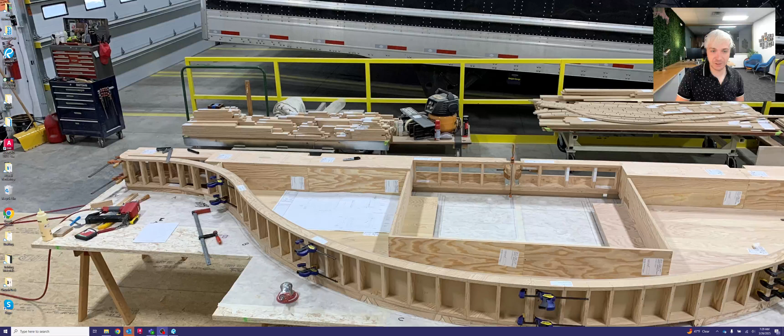Okay, this is video 3A. Today we're going to be talking about the standard cabinet construction as well as cabinet vocabulary. So as you work on things like cabinets, you're going to hear a lot of terminology thrown out there, which may not make a lot of sense to you right now. But we're going to go through that one by one to help you understand some of the terms that you get to hear when you're talking about cabinets or when you're working with cabinets.

So without further ado, I have these drawings pulled up. These are standard construction drawings produced by our engineering department here to help you understand the construction and the intentions of how we want to plot cabinet drawings. So let's start with base cabinets. So looking at the first page of this document here, these are base cabinets.

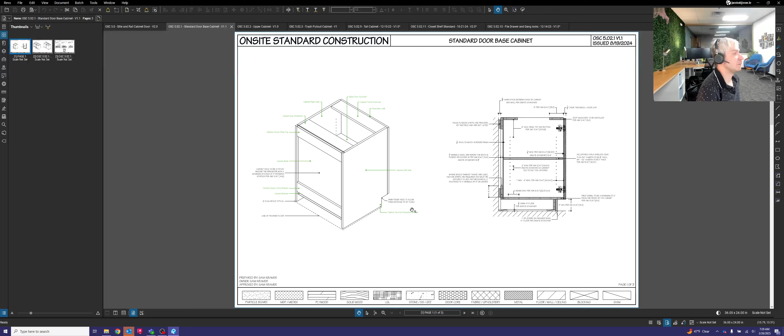Now, base cabinets are just cabinets that sit on the floor. You're also going to be looking at upper cabinets later today. Upper cabinets are wall-mounted cabinets. Of course, they are upper because they are hung above a counter. And we'll talk about that a little bit more as we get into that.

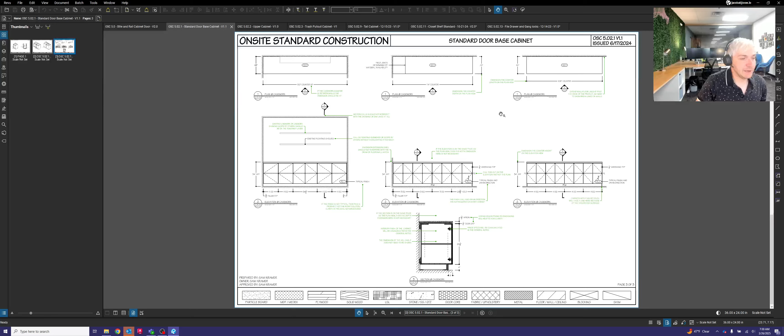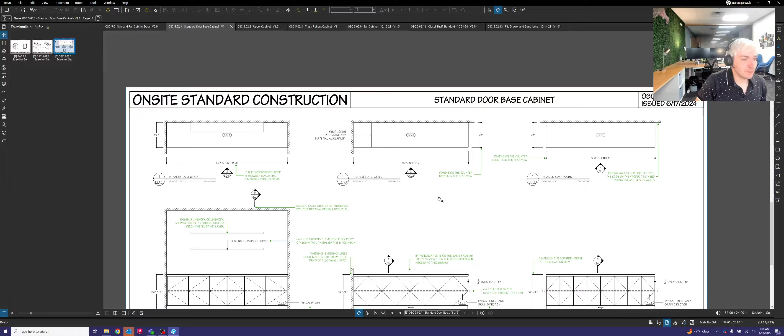With all cabinets, we'll go through the vocabulary here. Let's see, I'm looking at the plan view of this middle drawing here. So this is looking at the top down of a bank of cabinets. So you're seeing the countertop right here. And this line with the dashes represents walls around these cabinets. So these walls here are going to correlate to the elevation view down here. So this is looking at the front of the same bank of cabinets.

All right. And so going back to the top-down view, you can see there is no wall on the right-hand side. So these cabinets are kind of open to the room, meaning that one of the vocabulary terms I have for you here is what's called a finished end. On our drawings, we'll label that with an FE to the side of the cabinet that is going to need to have a finished end. Now, finished ends, it's just a term used for our shop and for our installers to understand that the side of this cabinet needs to have the same finish as the front of that cabinet because you will see it in that room.

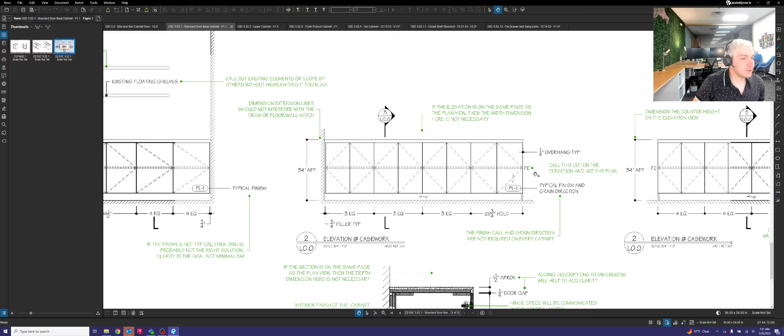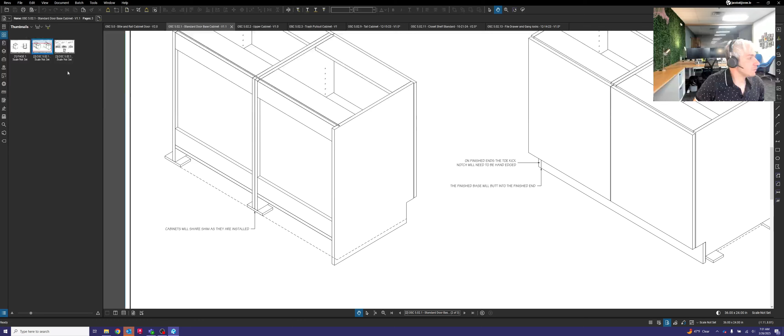So think about it like going back to this view here. So if this is that finished end here, this is the side of a cabinet because you're seeing this is the front door of the cabinet there. This is the side of the cabinet and this is the back of the cabinet here. So the side of this cabinet is what we would call a finished end because it is open to the room. Okay, so we'll go back here.

On the other side of the coin, if you have a cabinet that is going to be placed next to a wall, so like on the left-hand side of this plan view and the left-hand side of this elevation view, you will have to add what's called a filler. Now, our standard filler on cabinets is 3/4 of an inch. That doesn't mean that it has to stay 3/4 of an inch.

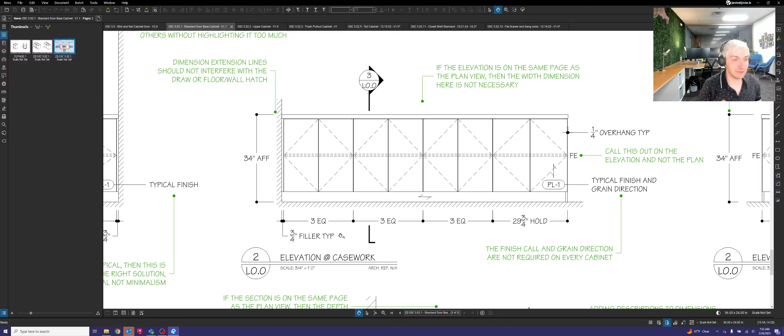Of course, if an architect is persistent on asking for a filler that's wider, we can definitely make a wider filler for them. We do like to deal with what we can as far as standards go for construction. We like to try to remain within standard as much as possible. So most times when you see a filler, it's going to be 3/4 of an inch wide, hence what we've got here.

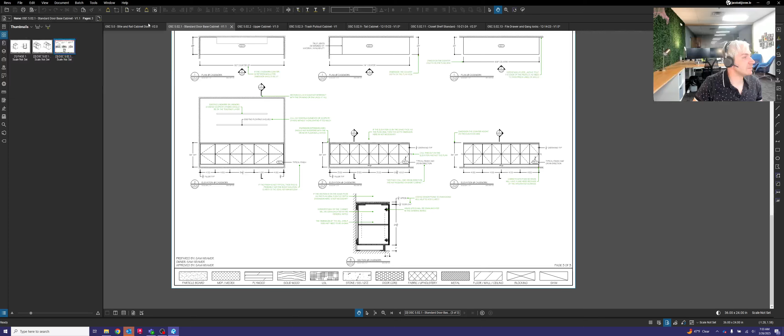Later on, we're going to talk about inside corner fillers, and those fillers are going to be a little different. They'll be wider than 3/4 of an inch, but we'll talk about that here shortly. So actually, why don't we just look at one right here if I can find one. Let me see if I got one in here. I might not. All right, so an inside filler is when you have two banks of cabinets that are coming together at a corner, 90-degree corner.

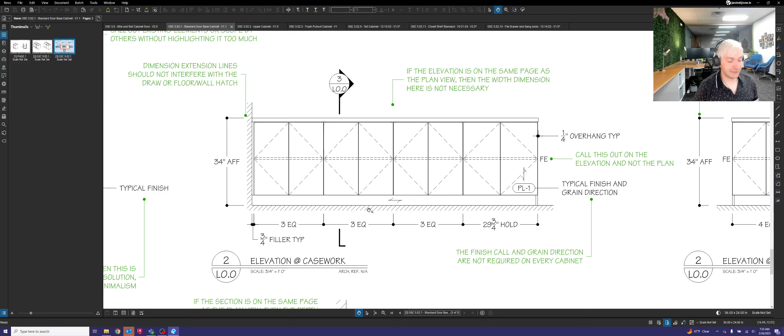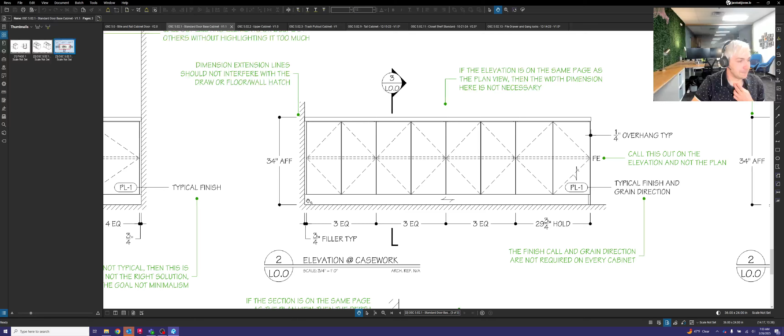I'll try to include a picture of one of those here if I can find one. But anyways, when you have an inside filler, meaning when you have two cabinets that are 90 degrees from one another on the inside corner of a cabinet or inside of a kitchen, you're going to need a filler that is 2 7/8 wide. Now that's 2 7/8 actual filler size, the seen part of it.

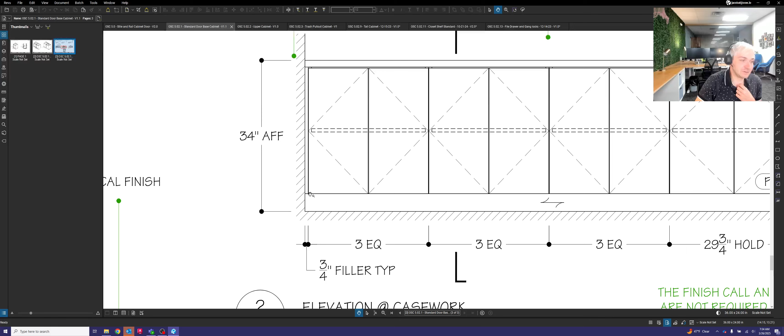So imagine there's a cabinet here, and we're looking at the front of the cabinet at that 90 degree, and then we have a cabinet over to the left-hand side. Now our filler would be 2 inches visible on an inside corner, but 2 7/8 total with the door excluded. So it's hard to visualize that. I'll try to come up with a better visual for you here shortly on that one. But that's what a filler is.

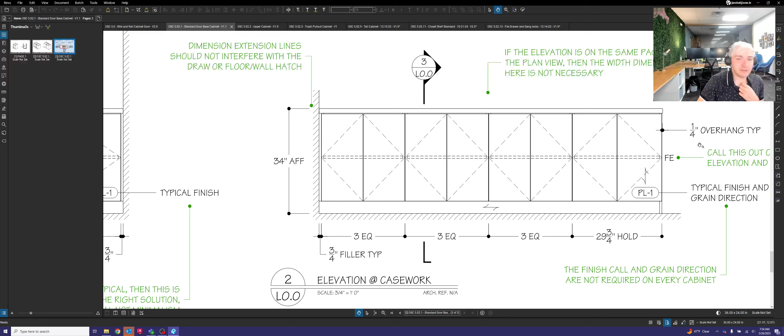And a filler really is there not just for, it's not like an aesthetic piece of what we add to the cabinets, but what it does is it prevents the cabinet door from swinging open and hitting the wall on the left-hand side. It also helps with occasionally you'll have a cabinet pull. So you might have like a bar pull on your cabinet that sits there. And as that door opens, you want to make sure that that filler is there so that this pull does not hit the drywall and do damage to the drywall or scuff it up. So fillers serve that purpose.

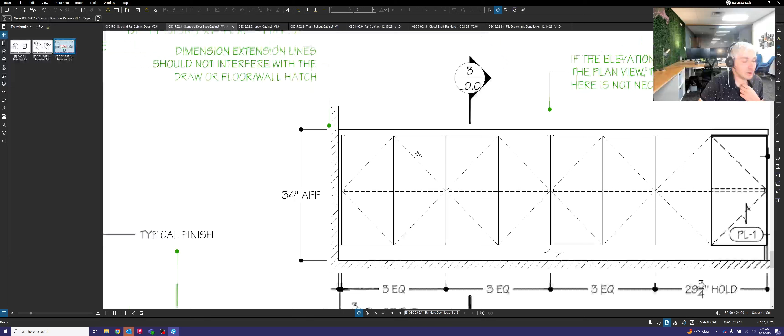We will also be looking at hardware later on. So in addition to fillers, there is a hardware that we use. It's called a hinge restrictor clip. And hinge restrictor clips also help with preventing the door from swinging open too far where it would hit the wall. They limit the angle of the door as it opens, so you can't open it past like 90 degrees, for example. So we'll talk about that in the next video when we talk about hardware, but that's another solution that we have that actually helps prevent drywall damage when a door is sitting next to a wall like this.

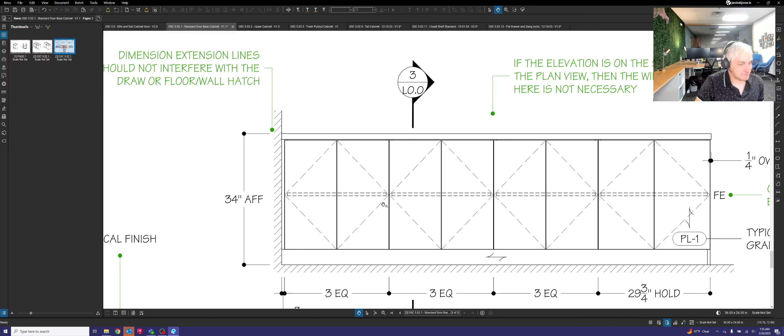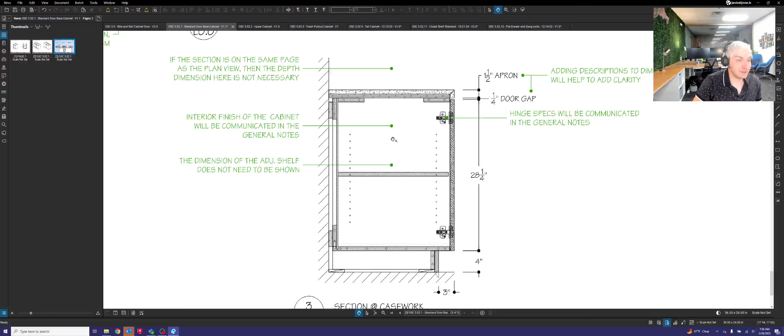All right, we are going to switch gears just a little bit. We're going to go look at a section view through a cabinet here. So let's go down to this view down here. So this is a slice through of a cabinet, a section view. You can see that we're cutting through that cabinet and we're looking this direction. So we're cutting through the cabinet vertically, looking that way towards the right. So that's what this view is here.

Now, there are some terms that we need to look at with a cabinet section that you won't see in any other view. One of those terms is down here. These are called shims. Shims are essentially ways to level your cabinet. So if the floor in the building is not completely level, this will help make it so we can make our cabinet level at the top. So meaning that when we go to install the countertop, it's not going to be completely out of whack and not level with the building.

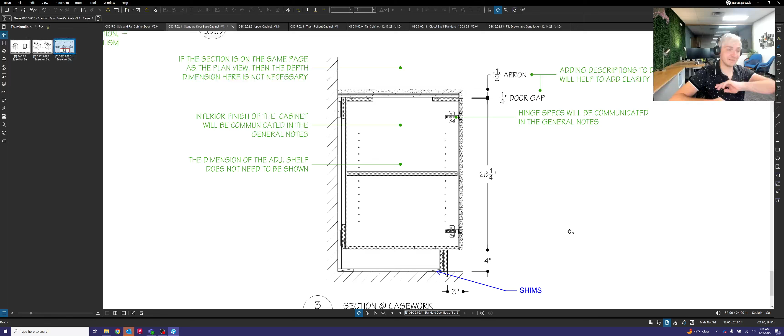So it is surprising, but a lot of the floors in these big commercial buildings are usually not level and they do have some variation to them. So that is why we have this shim space below our cabinet. So shims are just little pieces of material that we wedge under the cabinet to be able to level it properly in the field when it goes to be installed.

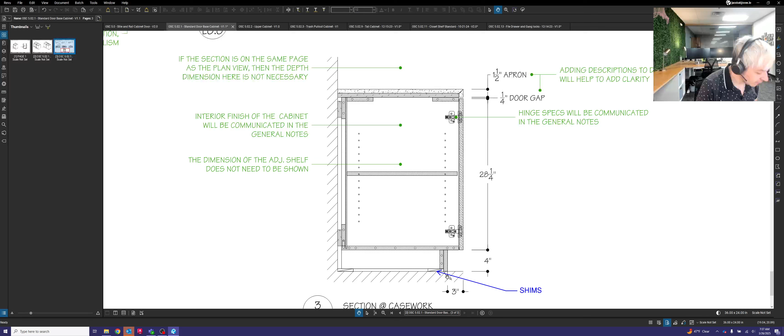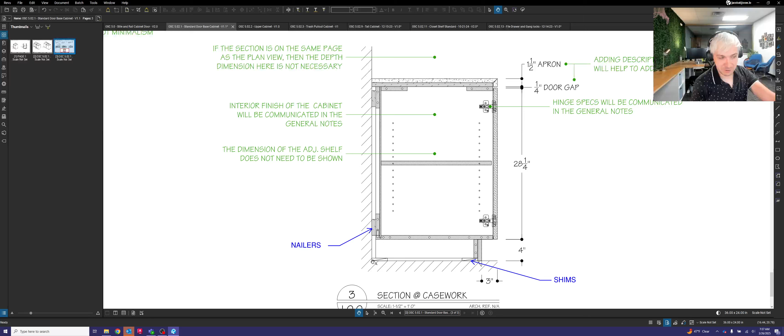At the back of your cabinet, you're going to see these wood blocks, just like this. These wood blocks that sit between the cabinet and the wall, these are called nailers. All right, nailers are typically going to be 3/4 of an inch thick by 4 inches tall. We'll sometimes use shim here too, but nailers will be used to kind of be able to control how far forward the cabinet sits.

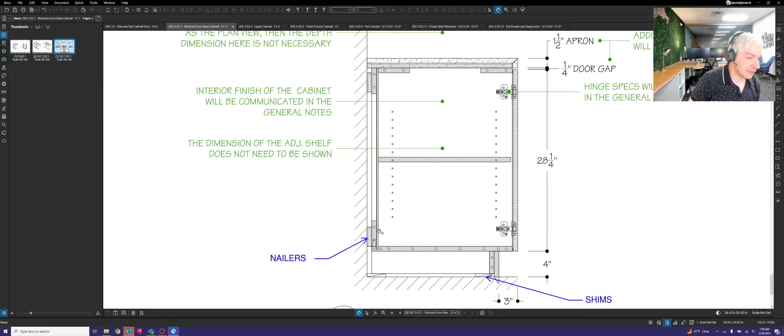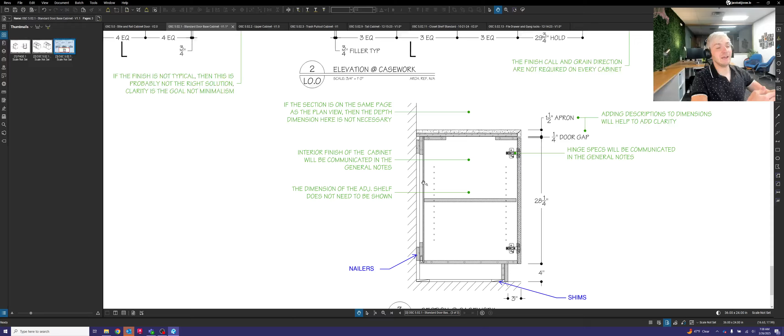So, for example, if you wanted your countertop, in this case, to be in line with your cabinet door, just like what's drawn here, you may need nailers or shim behind your cabinet to be able to pull that off, because just like the floor being unlevel, drywall does tend to be uneven as well. And so we're looking at a drywall wall that's back here behind this cabinet. And because it's drywall and sometimes they work a little too quickly when they install the drywall, it could be a little bit uneven.

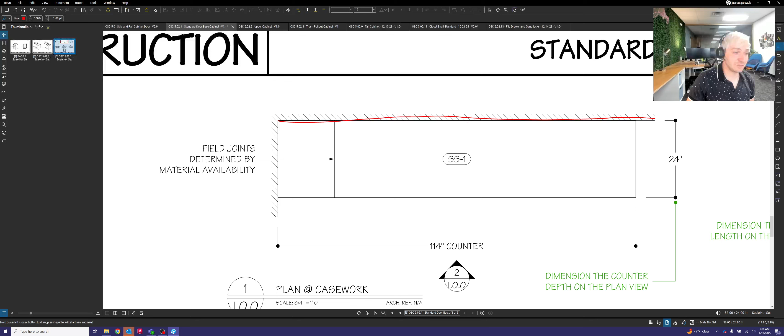So let's look at the plan view. If you look at a plan view here, it's not going to show that the drywall is uneven, but in the actual field, your drywall might actually kind of go in and out a little bit. And this is very, very dramatic, but it can vary slightly. So it might actually look something like this. And if that's the case, you really do need those nailers or that shim there behind the cabinet to be able to make sure that that cabinet is staying flush with the front edge of your countertop like that.

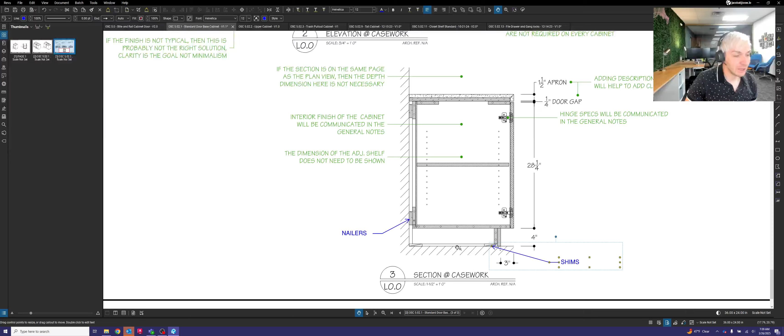So all of our cabinet blocks have those built in, so you won't have to really worry too much about having to include that on your drawing because it's already pre-drawn for you, but it's something to take note of and to understand why that's there.

If you see these little tiny circles on your cabinet block as well, these guys are wooden dowels. All right, so that is just a really tiny cylinder of wood that is used to apply glue to and to allow the side of the cabinet to be glued to the bottom and tops of the cabinet.

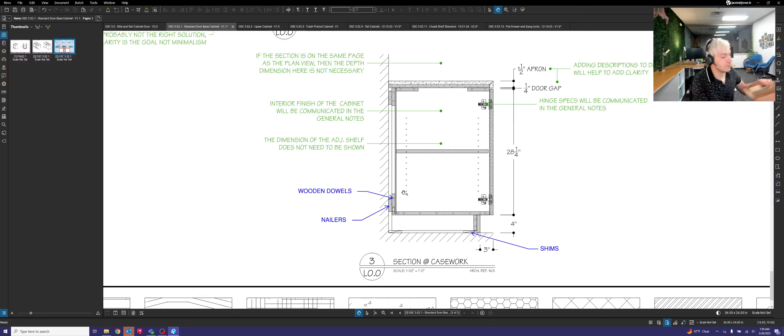I thought I had one here with me. I was going to present it here. If you'd like to see what a dowel looks like, you can go through the drawer behind you if you're in Loves Park, or if you're in Austell, go ahead and get a hold of me. I'll show you what one of those looks like.

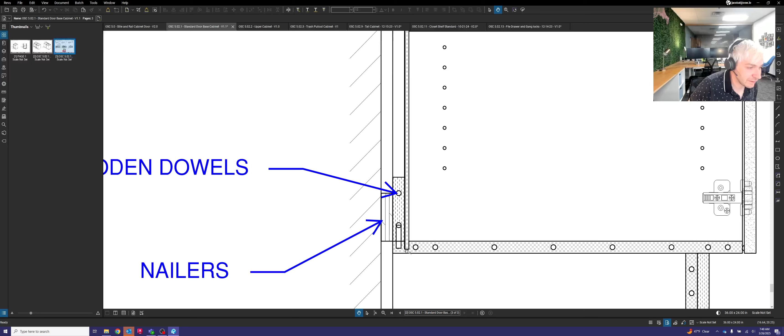But yeah, that's wooden dowels is what you're seeing there, as well as right here. Those are there to help hold the cabinet together as it's being glued. And once the glue is set, those dowels help hold it all together, make sure it doesn't go anywhere. It makes the cabinet real nice and sturdy.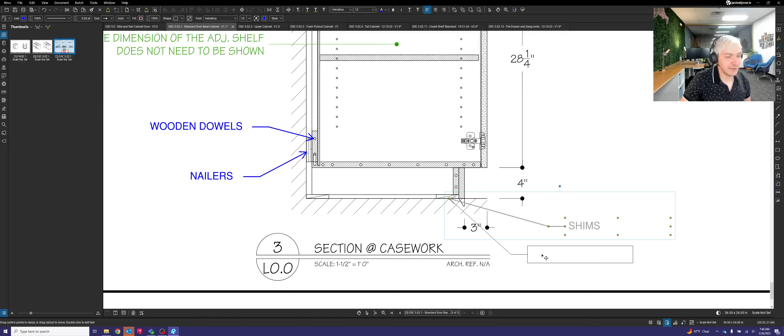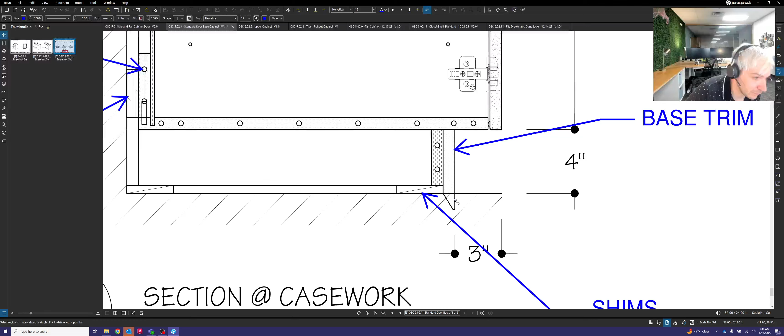All right. Also looking at the front of your cabinet, we have what is called base trim here. Okay. And base trim is used throughout a building typically. You will see it on cabinets a lot, but also on walls of the building as well. So at the bottom of that base trim, there's another vocabulary term we're going to talk about, and that's called scribe. Scribe, like that. So scribe is another form of leveling, essentially.

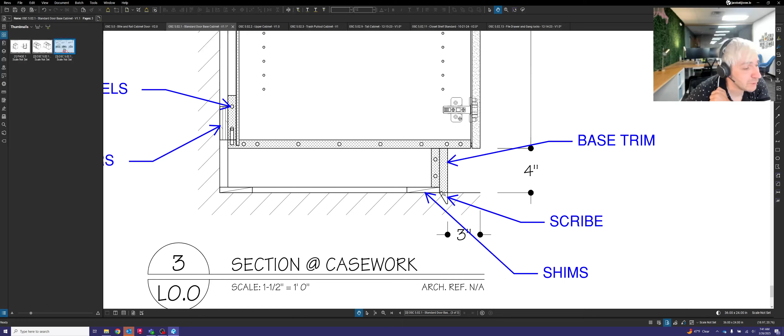So just like we level our cabinet because the floor may be out of whack, like it may not be completely level, if we were to make this base trim exactly 4 inches tall and the floor did kind of vary in height, this base trim would have a gap below it if the floor dropped at all. And so what we do is when we go to produce this base trim, we're going to add what's called scribe. Scribe is typically 1 inch tall.

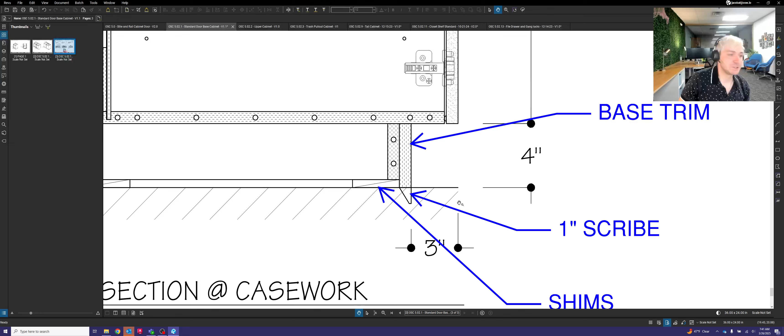And all it is, we are setting this base trim an inch taller than what's intended. And it has this little chamfered edge on the back of it, which will allow the install team to be able to install this. And if they need to, they can cut it down to be level with the floor. So scribe is really important when it comes to anything that actually is touching the floor in terms of panels or trim that's riding the floor like that.

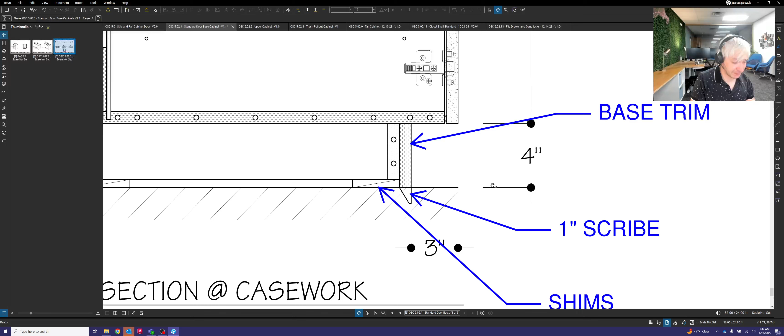You want to make sure that there is scribe there because it will make a huge difference when you go to install this. So again, it's kind of hard to visualize that from the AutoCAD side or from the engineering side. If you ever get a chance to go out in the field and see a job site, you kind of realize like, hey, this is why we need this here. Because a lot of times these floors are not completely level. So, all right, that's scribe. We've talked about nailers, shim, fillers, finished ends, and scribe so far.

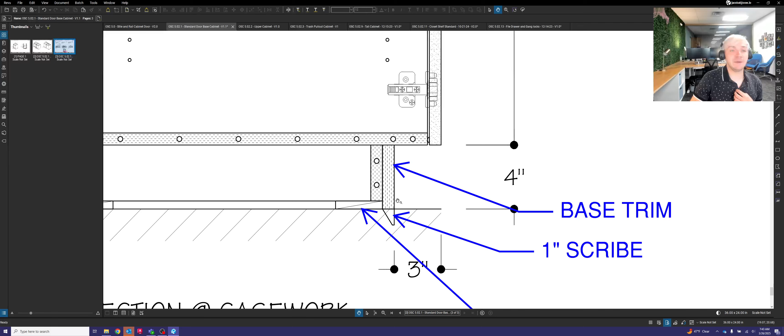Let's see, what else do I have for you? So we're going to also talk about a couple other things. Where the base trim is located, if you see a notch like this at the bottom of a cabinet, this is what is called a toe kick. So the toe kick is located at the bottom of the cabinet, and it's going to be just like this. That's another common term that you're going to hear when you're dealing with cabinets. So that's your toe kick there.

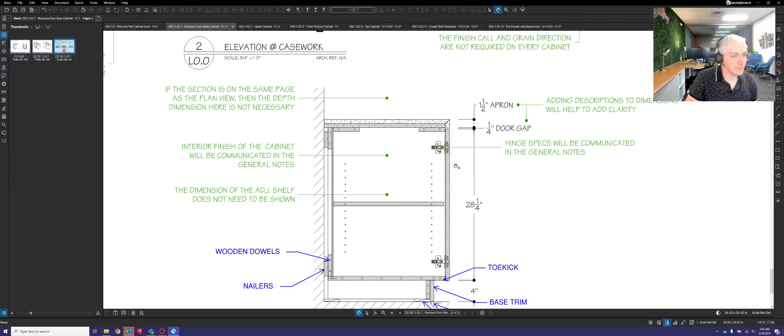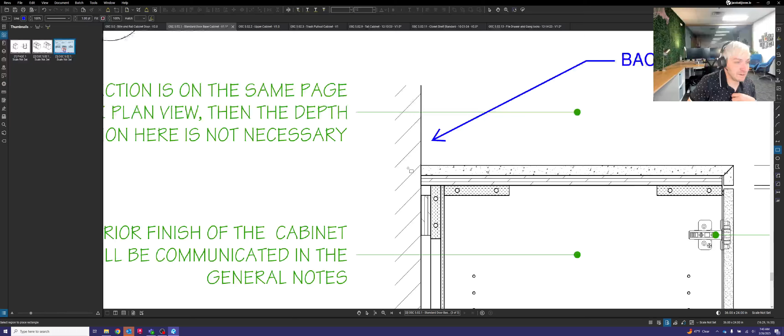As we make our way towards the top of these cabinets, although it's not drawn here, you've probably seen this before, but there are sometimes some things that are called backsplashes that you'll see. Let's call it backsplash here. It's, like I said, not drawn here, but a backsplash is kind of an extension of the countertop that sticks up like this. And sometimes there's even going to be things that are called side splashes, which are in the background here. You're going to see that right there. A side splash that's back there on the wall beyond.

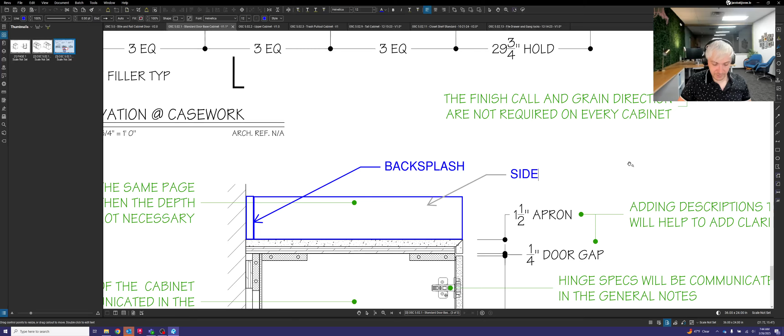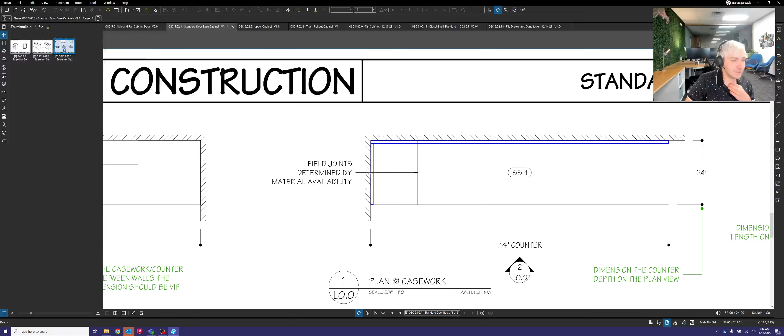All right. So we'll look at this in the plan view as well. So if you're dealing with a backsplash or side splash, what you're going to see in the plan view is your backsplash is going to run just like this, and your side splash is going to run right there on the wall side. You won't ever have a side splash on a finished end or an end that's open to the room, but if you have a wall like this, 9 times out of 10, they're probably going to ask you to provide a side splash too if they're including a backsplash.

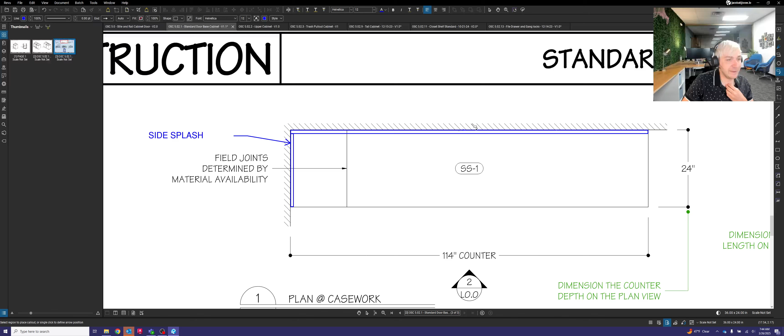So again, terminology here, this is your side splash. And this is your backsplash here. There's a couple other vocab terms for your cabinet drafting here. So once we get through that, we're going to make our way over to upper cabinets next. So upper cabinets, like mentioned before, they're just cabinets that hang on the wall. There are a few things we got to look at here that are a little different than what we have been talking about so far.

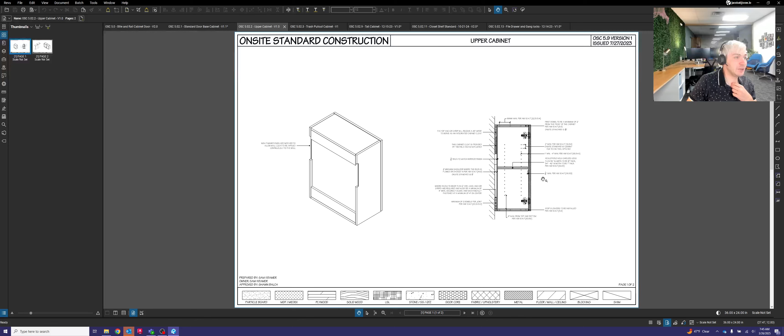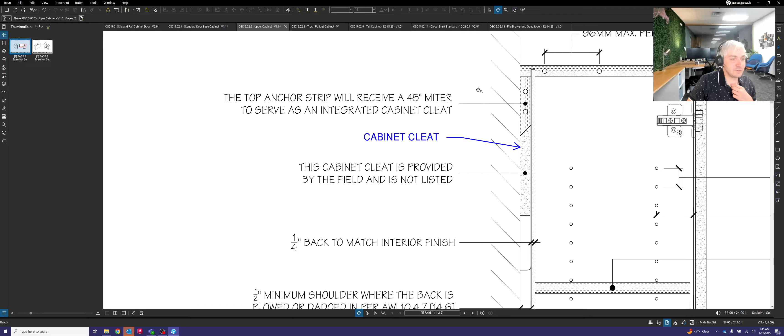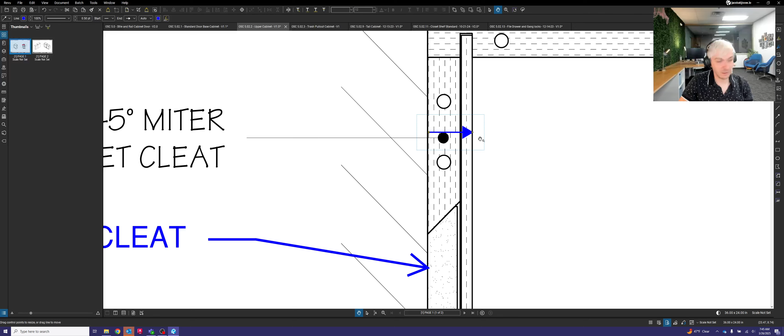So these cabinets, because they are mounted to the wall, they utilize what is called cabinet cleat. Cleat. Cabinet cleat is a form of French cleat. So if you do some Googling, you'll see French cleats are 2 pieces of material that are made to lap one another. So one piece of material will be fixed to the cabinet. So for example, this piece here is actually going to be screwed into the cabinet and doweled in. So this piece here is your upper cleat.

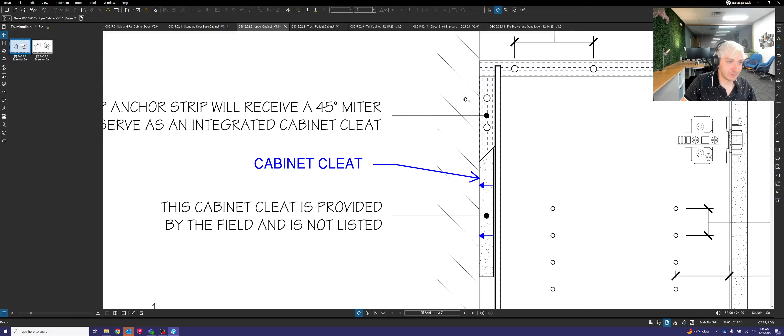All right. And then this piece that's down here is going to be the lower cleat. Now this part gets fastened to the wall behind the cabinet. So this will be screwed in like that to the wall. This will be glued, screwed, and doweled to the back of your cabinet. And then when they take this cabinet out to the field, they'll put this on the wall, and then they'll just take this cabinet, and all they got to do is lift it up and drop it on that cleat, and that cabinet is fixed in place and it's not going anywhere.

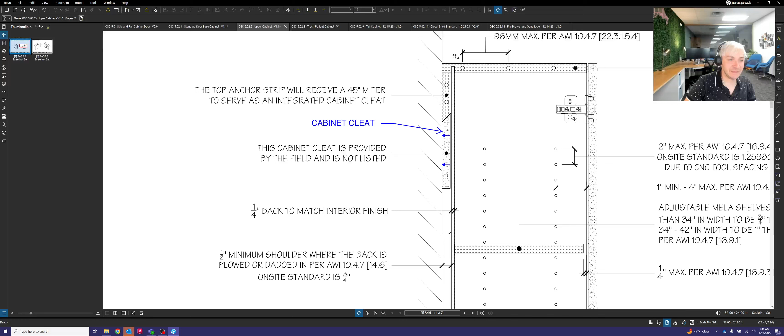So that's cabinet cleat. Usually sits right behind an upper cabinet just like this. We'll talk about panel cleat here when we get to panels later on as well, but that is just a form of attachment to the wall. Let's see what else we've got. So we talked about dowels already. That's the same thing here, wooden dowels here. All right.

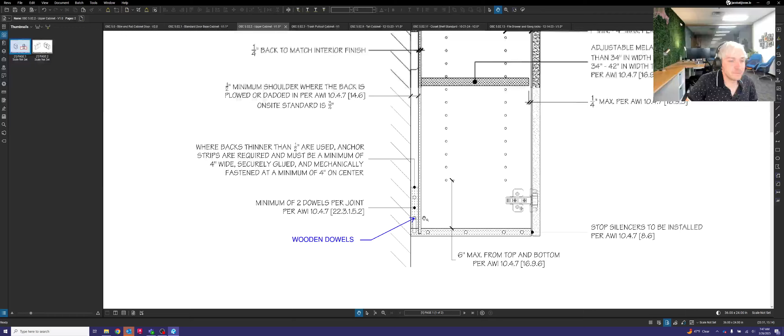Now upper cabinets though, a lot of times they will have what's called a valance. Now the valance can be located at the top or the bottom of the cabinet or sometimes both. And I'm going to see if we have, doesn't look like we have one in here specifically. So what I'm going to do is on the side here, I'm going to open up AutoCAD. I'm going to show you what a valance should look like on an upper cabinet.

Valances will usually be placed on an upper cabinet; most times what they're there for is to hide an under mount light fixture that sits below the upper cabinet used to illuminate the countertop below. So I want to kind of look at one of those real quick here with you. I'm going to open up an AutoCAD template file and we'll pull one in here for you.

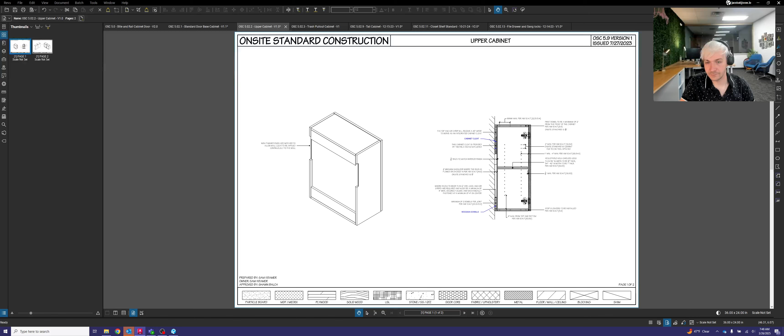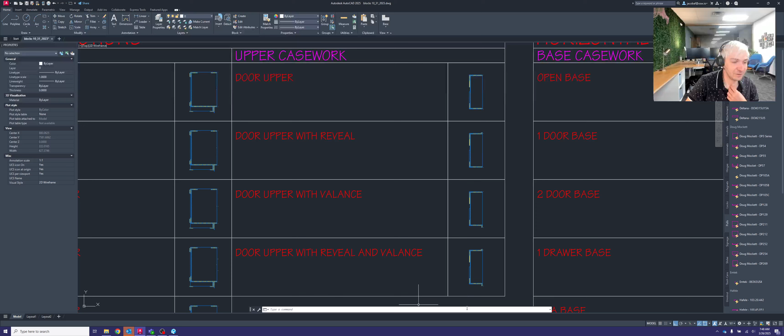Okay, let's take a look at an upper cabinet with valances. So, all right, here we go. Upper cabinets. What I'm looking at here is what we call the blocks file. This is what feeds the information into your tool palette. So all of these are available to you within the tool palette as well. This is just a kind of database that holds all of those blocks.

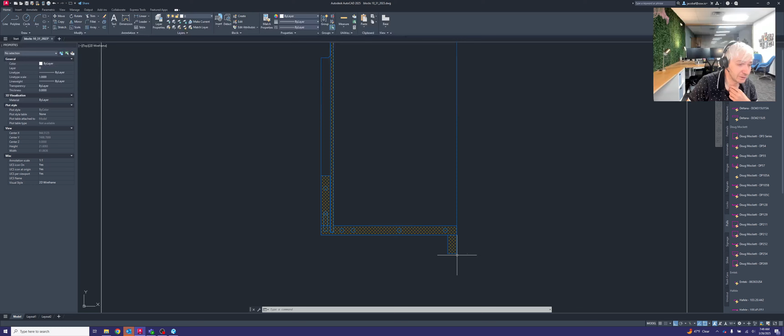So, right. This is an upper cabinet with a valance. So as mentioned, usually there's a light fixture that sits right here below that valance. And the cabinet is constructed with a piece of material that just sticks down below the inside of that cabinet. The cabinet door on something like this would still sit right here.

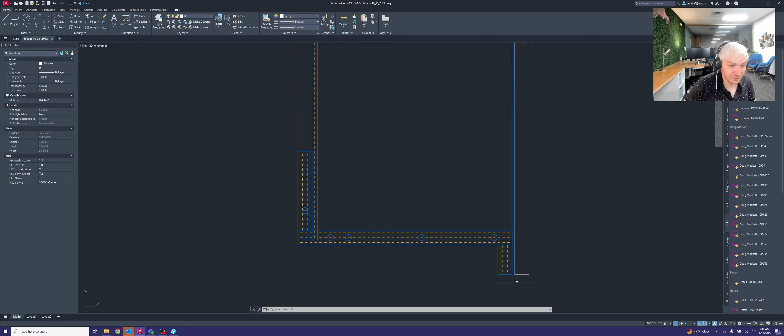Let's see, 0.75. Okay, so that white rectangle there is representing where your cabinet door would still sit. So the valance sits behind; the cabinet door sticks down, usually in line with that valance there. And then they usually will put a small LED light fixture right behind here, which will help illuminate the countertop. It would be below this cabinet.

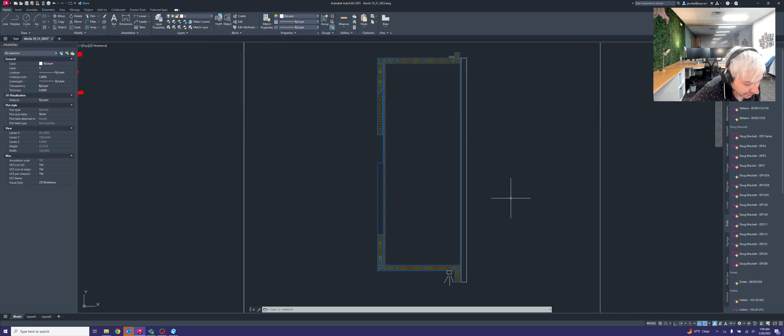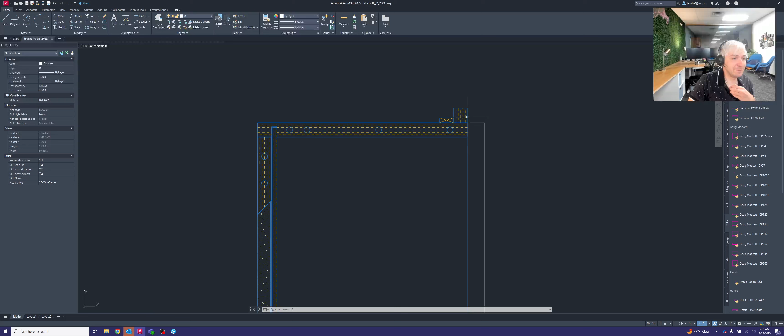All right, so with that being said, let's also talk about reveals here. So upper cabinets will use occasionally what is called a reveal. Reveals are a lot like fillers. So if you want to think about it kind of like that, just try not to get them too mixed up. A reveal is going to be a strip of material that sits between the cabinet and the ceiling above. So if you had a ceiling above this cabinet, let me drop one in here for you.

Boop, boop, boop. Oops, hold on one sec, sorry.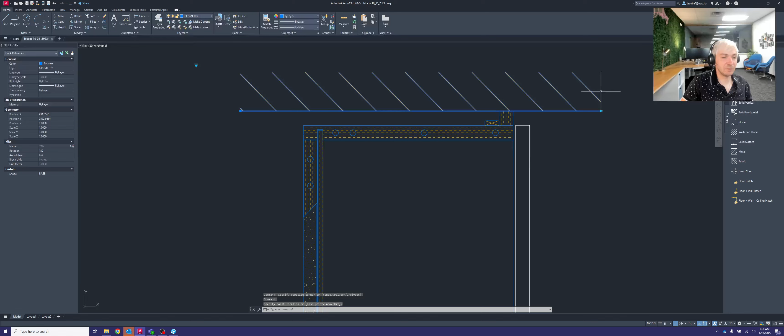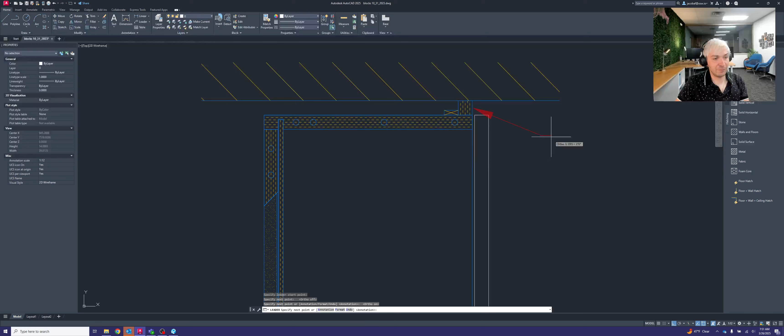Okay. So let's say your cabinet was constructed in a way where there was what's called either a soffit or a ceiling right above that cabinet. Now, if that does happen, it is going to be really important to remember that we do need to place a reveal in between the ceiling and the top of your cabinet. That reveal is going to typically be 3/4 of an inch.

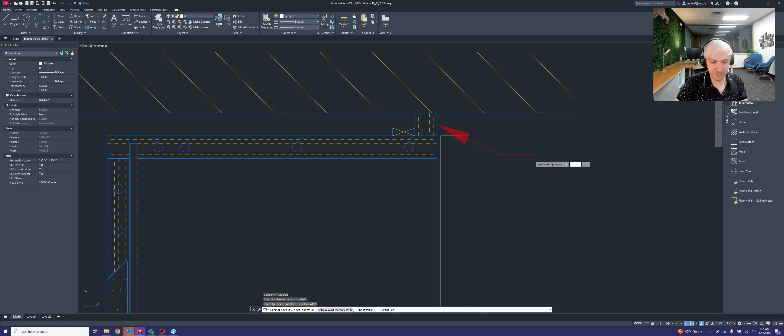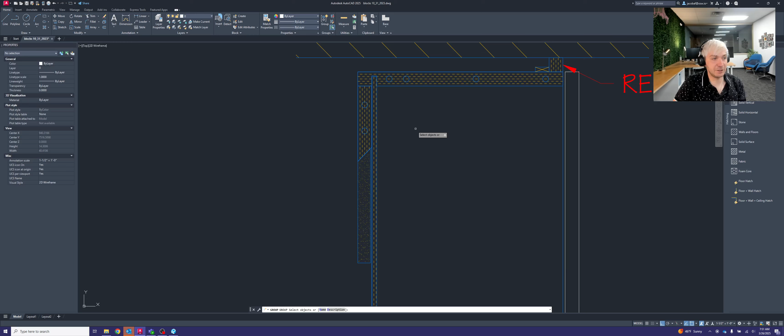And the reason that reveal exists might surprise you. You might think, well, maybe the soffit's wavy too, or the ceiling's wavy too, just like the drywall or the floor. Well, there may be a little bit of that, but really the reveal here is there for the purpose of, as you're installing this cabinet, the cabinet and the cleat that are attached to the cabinet need to have what's called lift-off space.

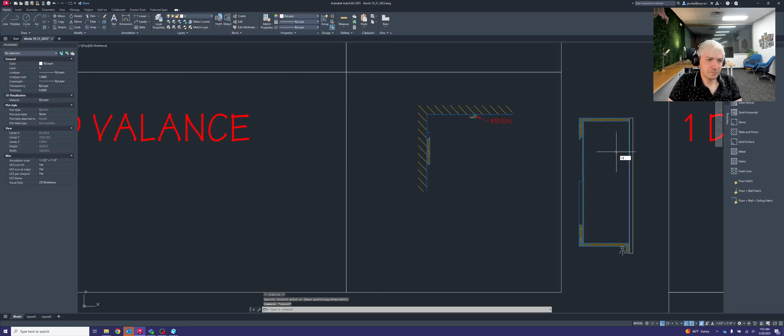So let me go ahead and group that together real quick. So I have this cabinet over here, and let me add a wall to this too. All right, so I have this cabinet over here on the side, and if I want to go to install this cabinet, I'm going to move this over so you can kind of see what's happening, I can't just slide the cabinet straight back because these cleats are going to actually hit each other and they're not going to allow that cabinet to pass through.

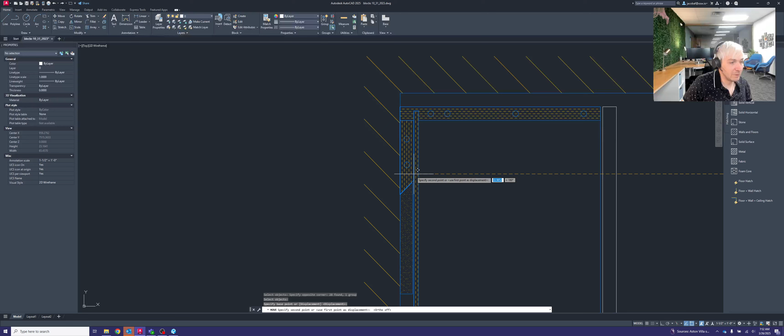So what I need to do is I need to have what's called lift-off space. So when I go to install an upper cabinet, I actually need to lift it up approximately like 3/4 of an inch, slide it back, and then drop it down like this, which will lock that cabinet in place, and then it's not going to go anywhere. But because of the angle on the cleat, I do need to be able to lift this up and move it forward or back to be able to install it.

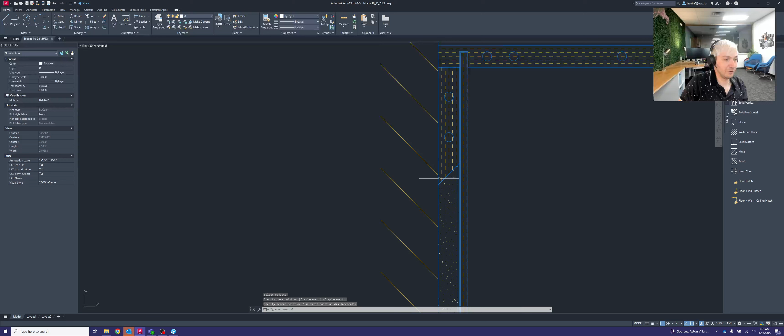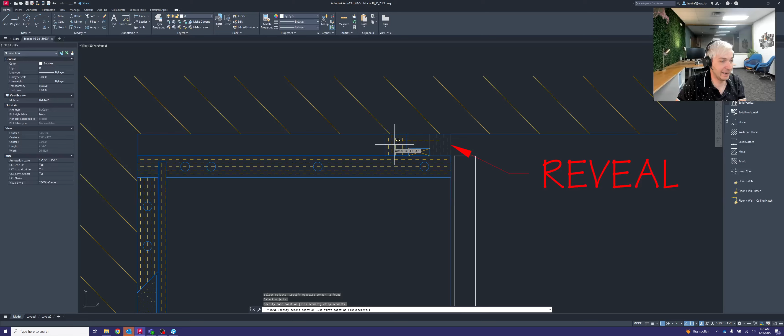So once the cabinet is installed, that's where we go and we put that reveal in after the fact. So the reveal will come in, it'll get shoved in place, kind of just like popped in above the cabinet. And then we'll usually put what's called a stop block behind it. The stop block's going to prevent that reveal from wanting to slide back across the top of the cabinet over time. And this little stop block here will be kind of attached to the top of the cabinet like so.

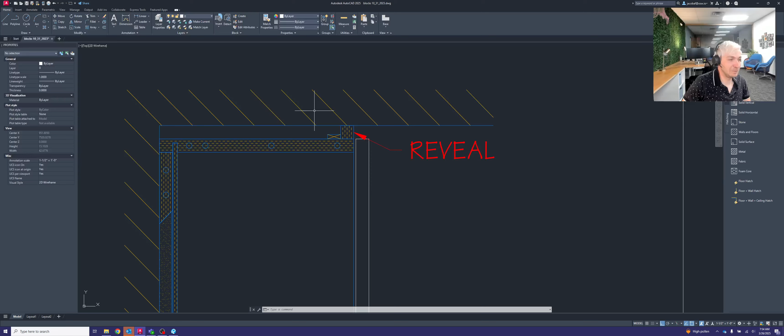So that is a reveal. Again, that's usually going to be 3/4 of an inch tall, and that'll go above your upper cabinet if you have a ceiling above your cabinet. If you don't have a ceiling above your cabinet, you don't have to even worry about that reveal. That's something that is completely unnecessary when you don't have a ceiling above your cabinet. But if you do, be really careful. You're going to want to add that in. A lot of times architects will not show that because they don't really have a full understanding of how a cabinet is installed. So we have to remember to add that in on our own. Just real important note there.

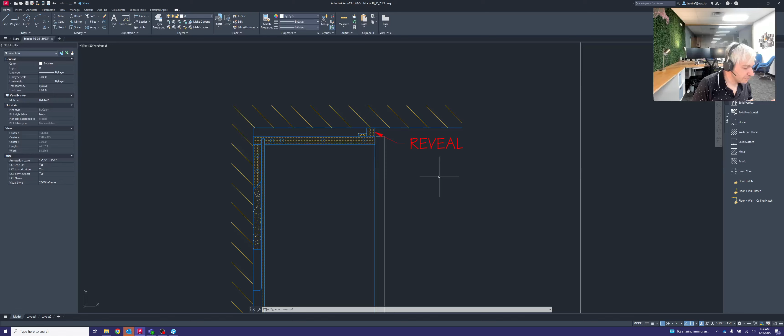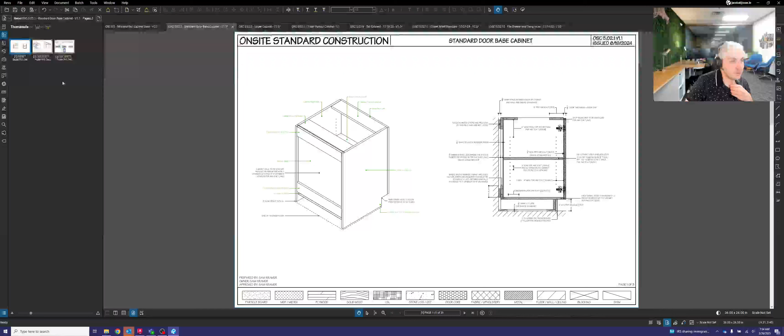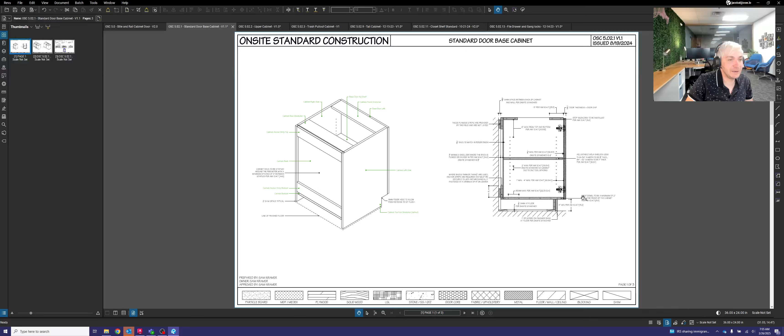So as far as all that goes, I think we have covered a decent amount of vocabulary for upper cabinets, as well as base cabinets here. We're going to be talking more about the cabinet hardware in the next video, so if you continue on, you'll see more of that. And all of these documents here are going to be in the engineering in-house drive under the quality folder. If you'd like, I can send you a link to that too if it helps you with understanding these cabinets and how they're constructed. Yeah, I think that's about it for right now. So we'll call this one here and we'll move on to cabinet hardware next.